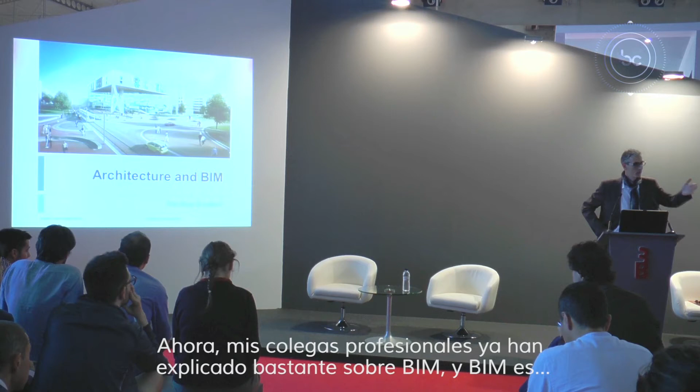Final frontier. Now, my former colleagues already explained you a lot about BIM, and it looks like the new holy grail, that we finally in architecture have found the holy grail. Is it? Later on we will see.

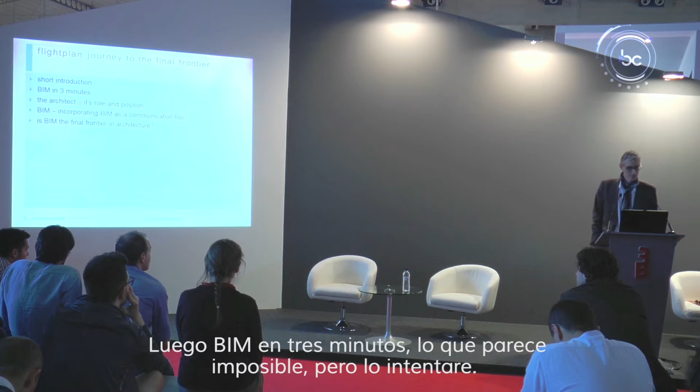I will give you a short flight plan of the journey to the final frontier. First I will start with a short introduction of myself, then BIM in 3 minutes, which seems impossible, but I'm going to try. Then what means BIM for the architect and its role and position in the designing process. Then incorporating BIM as a communication tool. And at last, is it the final frontier, or are we still looking at some developments yet to come?

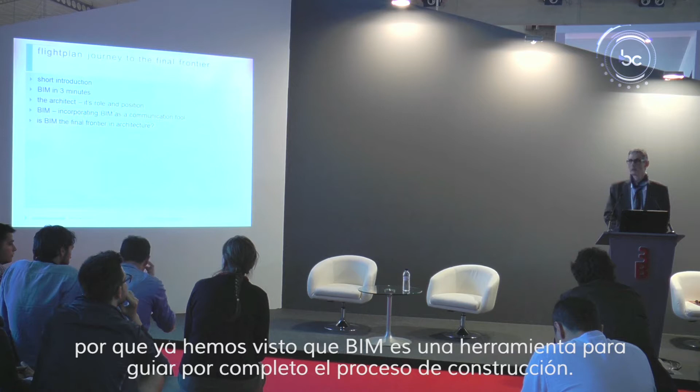Now I want to emphasize another side of using BIM, because we have already seen that BIM is a tool to guide the entire building process.

As already told, my name is Rafael Calis Sanchez. I work for an office in the Netherlands. It was founded in 1928, and we are a full-service office, which means from the first contact with the client until facility management and everything in between.

We design in all kinds of sectors, but we have a long history in hospitals, and later on I will show you a hospital using BIM, because that's very interesting.

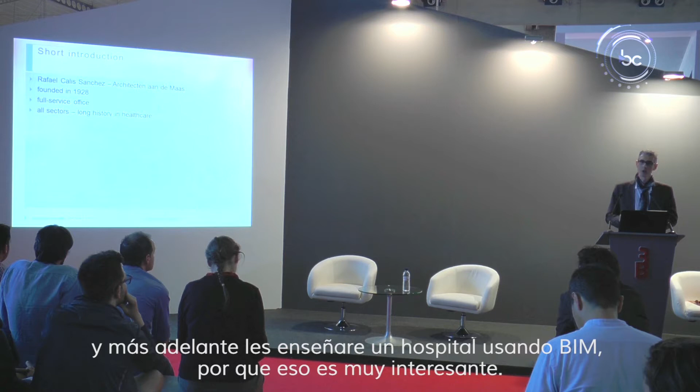A simple house in BIM, well, that's not that difficult. But a hospital is something very different, because you do not only have the physical structure to design, but you also have to communicate with your users, not just the client. My clients are the board of directors, but they are not the users of the hospital. Users are the medical specialists, and they determine how your design should look like.

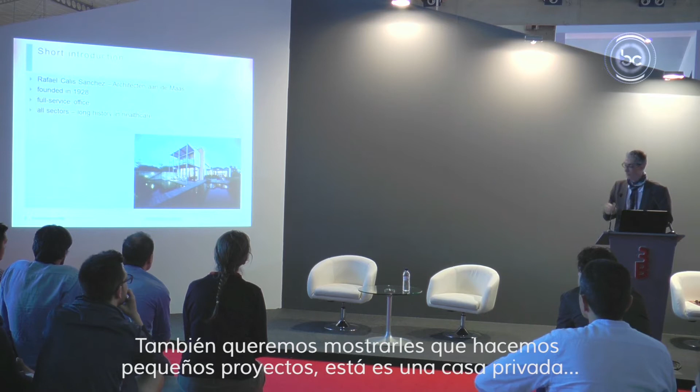We also make very small projects to show you. This is a private house of one of the directors, but up until large projects.

This is the hospital in one of the hospitals in The Hague. This is a middle-sized project for us, about 100,000 square meters. The project I will show you later on is a project of about 200,000 square meters.

But we also make urban plans. This is a development in Russia, a complete new technological city.

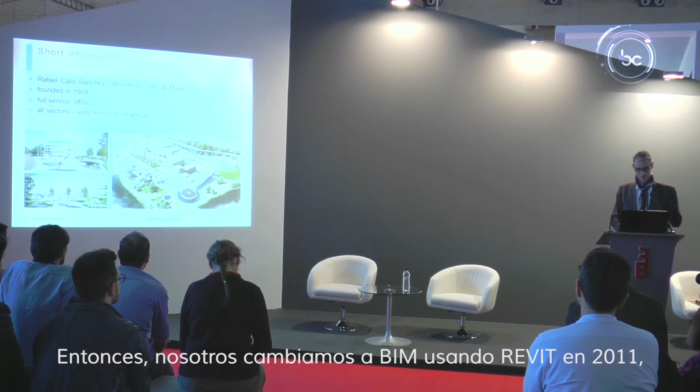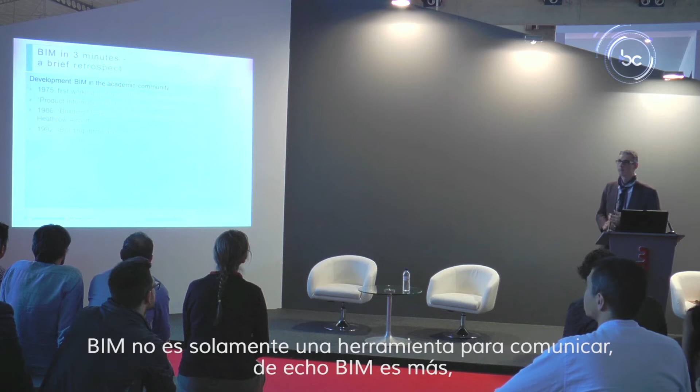Now we switched to BIM using Revit in 2011. One of the reasons why we use it is that BIM is not just a design tool. BIM is not only a tool to communicate. In fact, BIM is more. BIM is a working method. And later on I will show you what I mean by that.

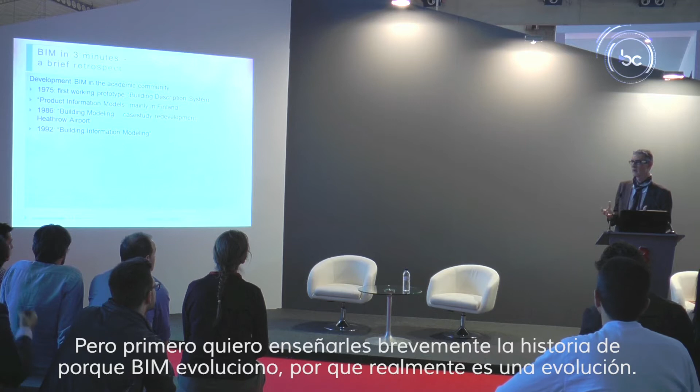I want to very shortly show you the history, why BIM evolved, because it's actually an evolution. You have two different worlds: the academic world and the commercial world. In the academic world, it already started in 1975. There was the first description of a building information model, a building description. Elements have information inside that can be extracted.

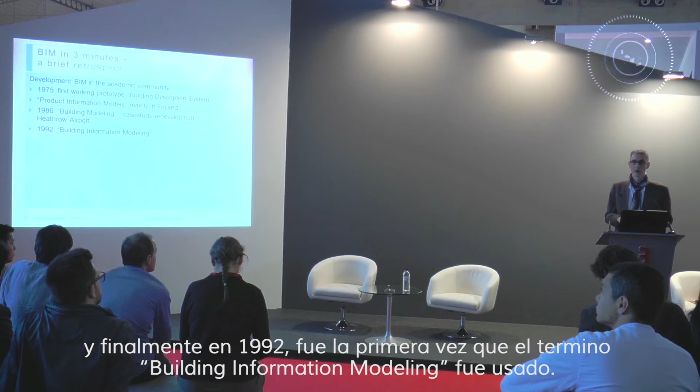From that point on, we saw a development until finally, in 1992, the term building information modeling was used for the first time. The difference between building information modeling and the first building description system was that the building description system was just elements. Building information modeling is all the elements put together, and they have relations with each other.

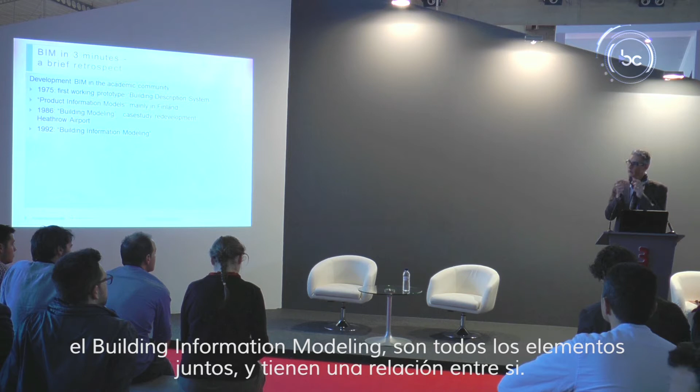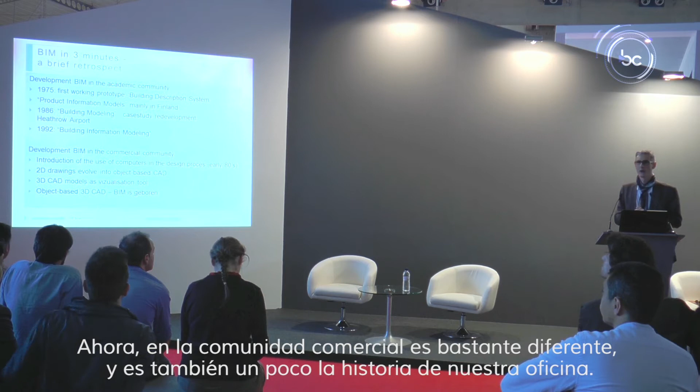Now, in the commercial community, it's very different, and this is also a little bit the history of our office. First of all, we started using computers in the early 80s in the design process—enormous hardware used for very simple design plans.

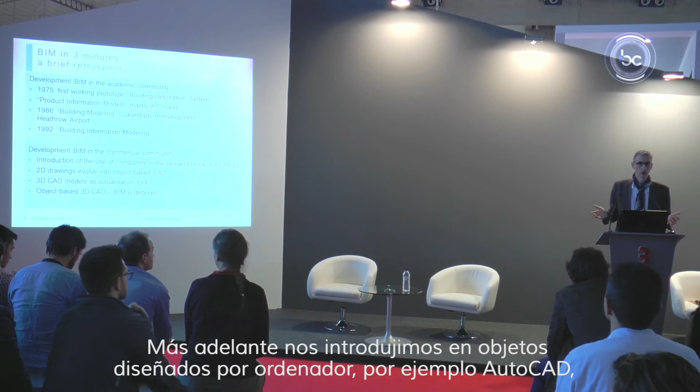Later on, we got into object-oriented, object-based computer-aided design, for example AutoCAD, and then slowly AutoCAD using 3D. We saw earlier an example of how difficult it was to make a 3D model in AutoCAD.

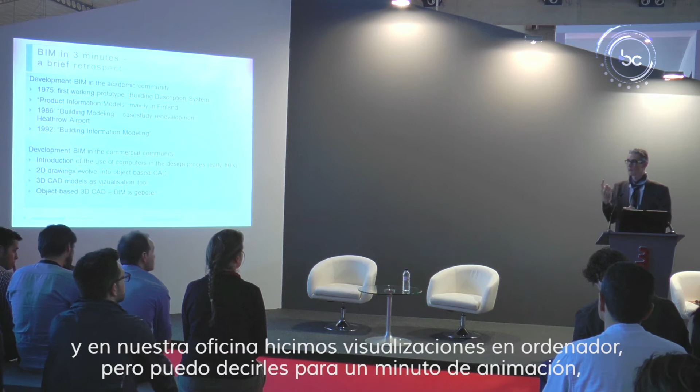And in our office, we made computer-aided visualizations. But I can tell you, for 1 minute of animation, we needed about 3 weeks modeling in AutoCAD, 1 week visualization in 3D Studio, and then 20 computers during an entire weekend calculating all the images. So it was an enormous amount of work.

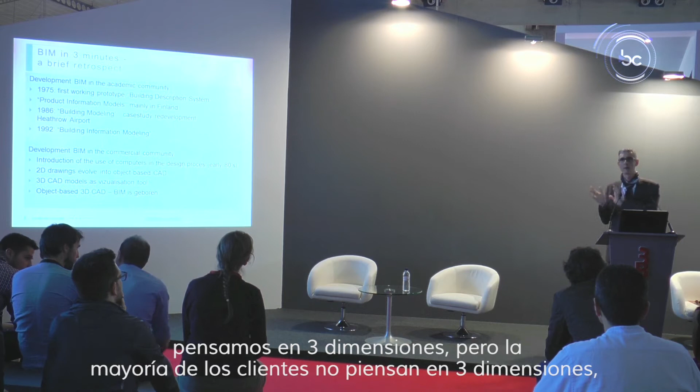But it worked. For clients it worked because, I mean, we are professionals, we think in 3 dimensions. But most of the clients do not think in 3 dimensions. So we need a tool to communicate what we have in our mind.

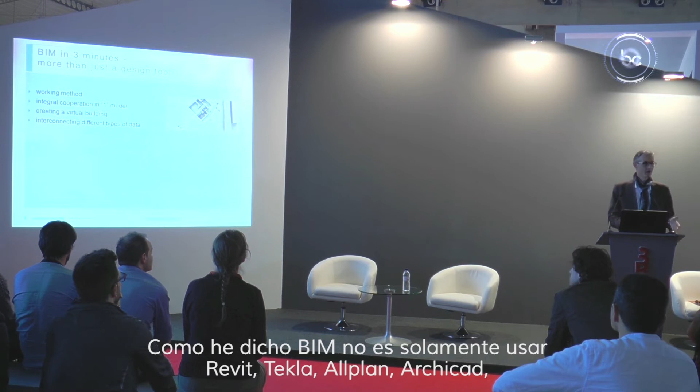And then in the 90s, 3D computer-aided design, object-based was born, and there we have BIM. Now, as I already said, BIM is not only using Revit, Tekla, Allplan, or Archicad. BIM is a working method.

BIM, in fact, starts with the very first question of the client. From that point on, BIM can be used, and as you can see, it's integrated in one model. You already said 40 models - we are using about 20 for the hospital.

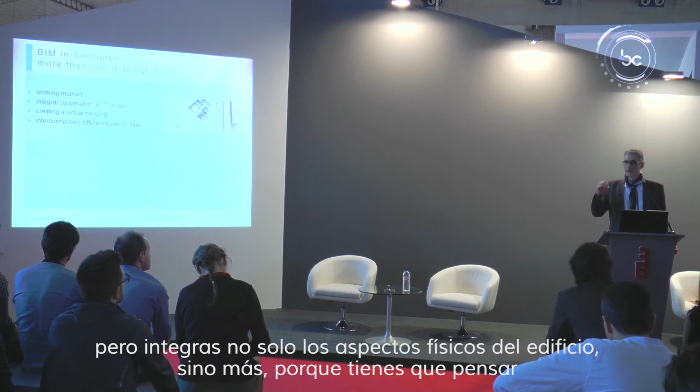But you integrate not only the physical aspects of a building, but more, because you have to think - and that's where I come in later - we have to think now, at the early start of a BIM model, how to build it.

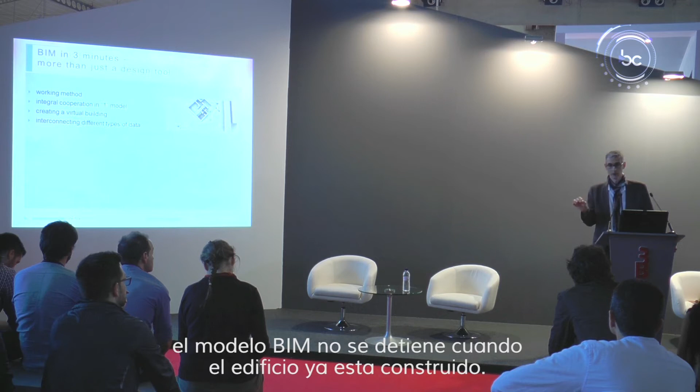Because if you do it right, the BIM model doesn't stop when the actual building is built. You keep using the building model, your 3D model, for maintenance and facility management. If you want to incorporate facility management aspects in your model, you should think about that at the early start, because then you still have the possibility to change your model. Later on, it will cost you a lot more effort and a lot more euros.

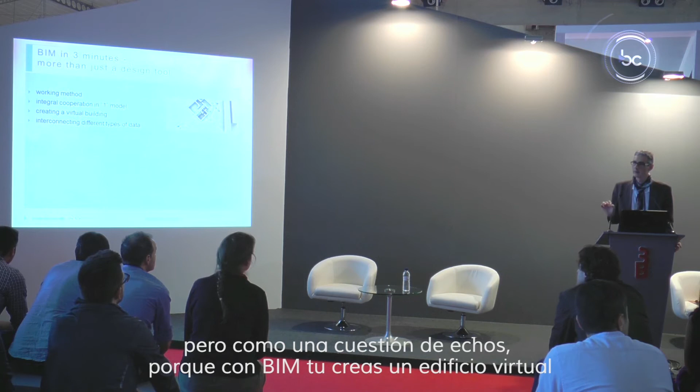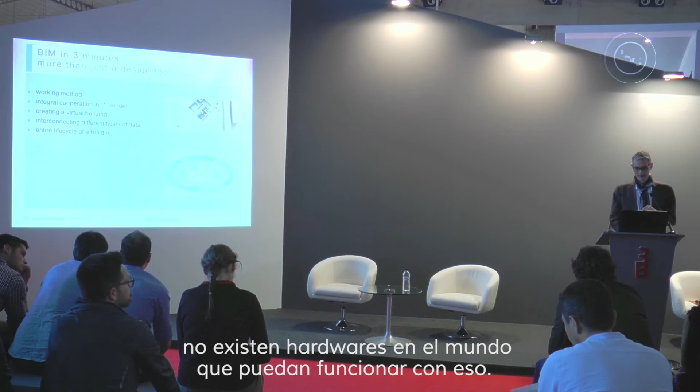As a matter of fact, with BIM you create a virtual building up until a certain level of detail - I don't know if you know the term level of detail 500, which is as-built, but I would advise you not to draw in LOD 500 because you get enormous models. There is no hardware in the world that can cope with that. So BIM is, factually, the entire life cycle of a building, from the first design until it's demolished.

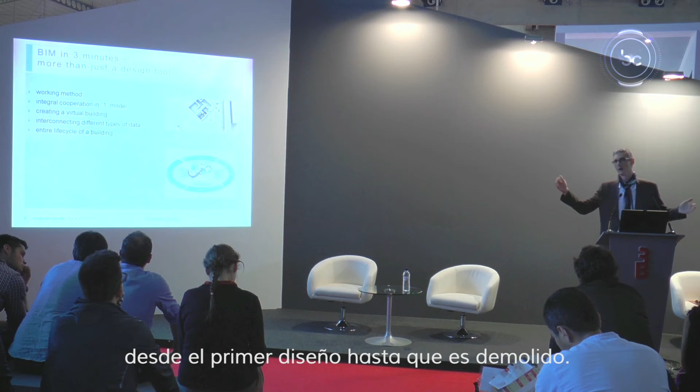Why is BIM so important? Well, I'm going to share a little example with you. I'm not proud of it, but I'm still going to do it. And that's the reason why BIM is, well, for 50% the holy grail.

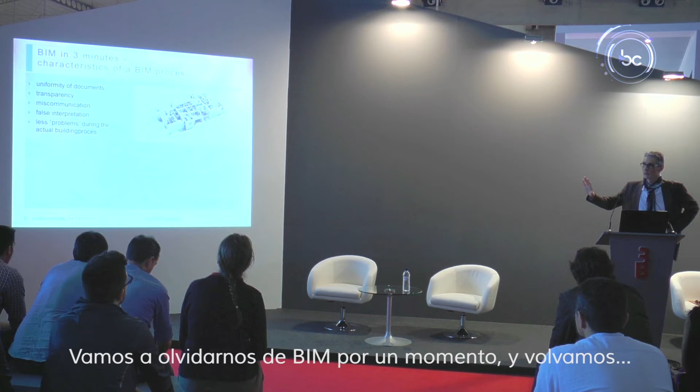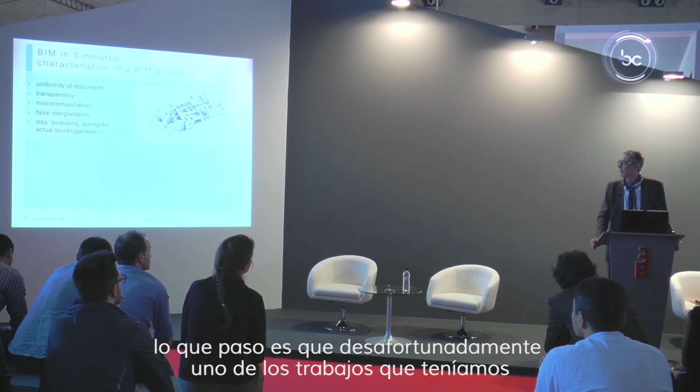Let's forget about BIM for a second and go back to the phase where we were still designing in 2 dimensions - drawing plans in AutoCAD, facades, sections, details, all in 2 dimensions, but all in different archives. Now, unfortunately, in one of the projects we had, there were some errors between a section and a detailed drawing.

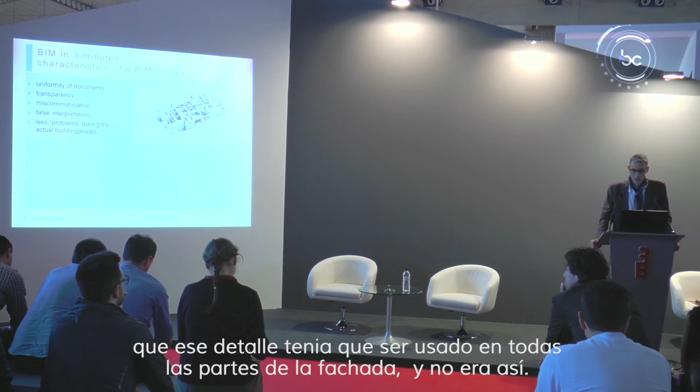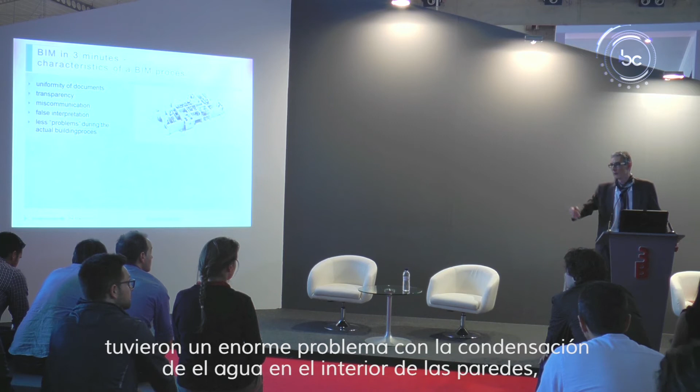The contractor built and saw the detail and assumed that detail had to be used in all parts of the facade, which it wasn't. It was a surgical department, and when they started using it, they had enormous problems with condensation of water on the interior walls.

And if something shouldn't happen in a surgical room, it's condensation of water, because it's not hygienic. We examined how it could happen, and we saw that changes were made in the facade, but the changes were not made in the detailed drawing. And there you have your problem.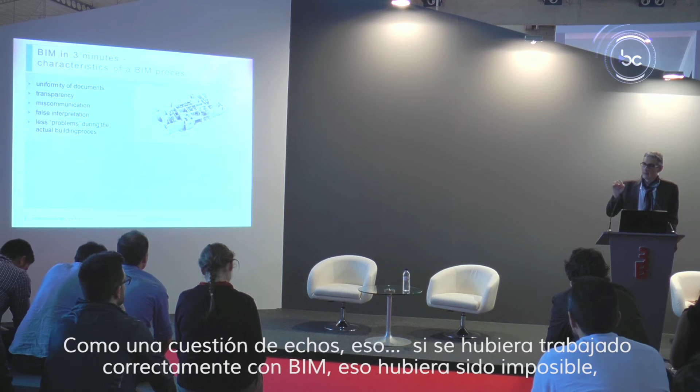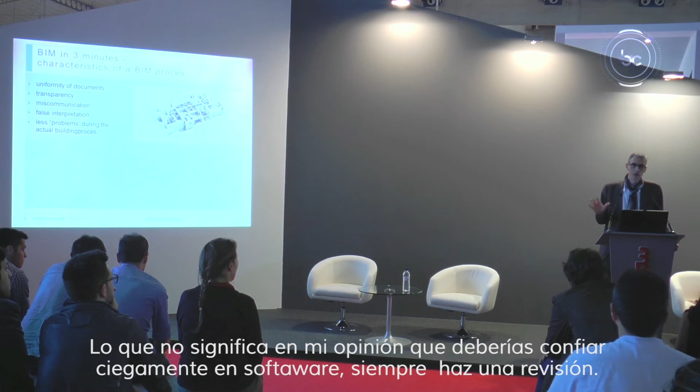As a matter of fact, if you work correctly with BIM, that should be impossible, because if you change something in the plan, it automatically changes in your section, and automatically changes also in your facade - which doesn't mean, in my opinion, that you should rely solely on the software. Always check if everything went well. Of course, during construction, it's a perfect tool, because we can, in advance, see where we have possible collisions. The margin of error and miscommunication is very, very small, and false interpretation is almost impossible.

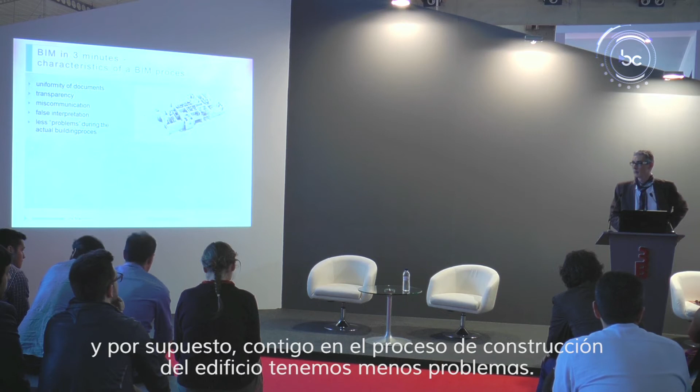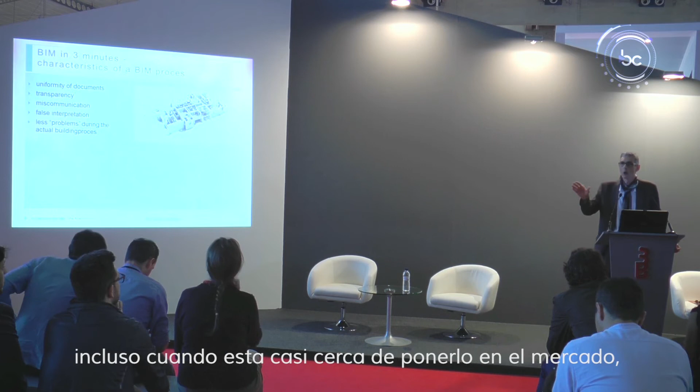Almost. And of course, during the actual building process, we have fewer problems. Let's suppose we have a floor, and in that floor I have to make a hole for an air shaft. If I do it during my design process, it wouldn't take a lot of time - even close to putting it on the market, it will cost me about 5 minutes. With my hourly rate, that's about 20 euros.

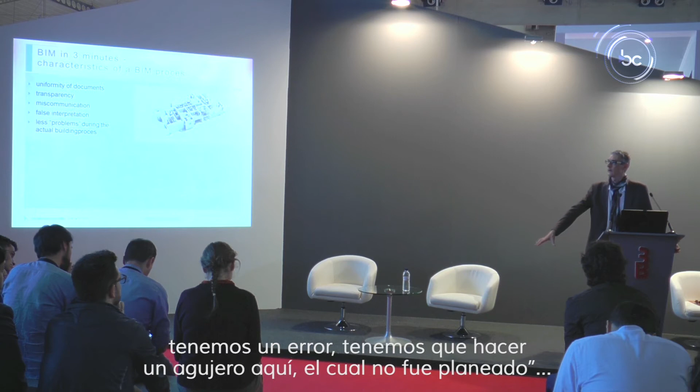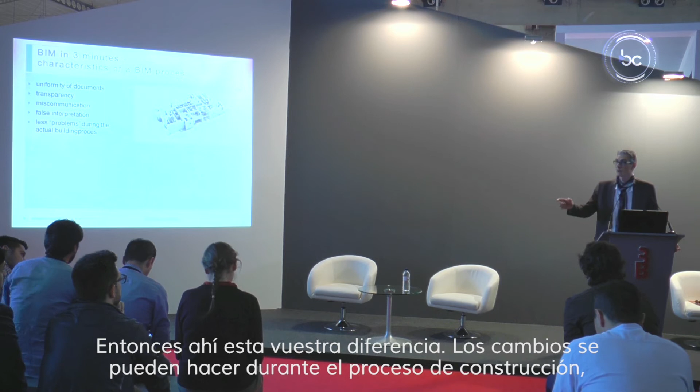That's it, changed. Okay. Now suppose the floor is already actually built, and then they discover, ooh, we made an error, we have to make a hole here which was not planned. I can assure you it will cost several thousands of euros. So there's your difference - changes can be made during the actual building process, but are far more expensive than changes made in the design process.

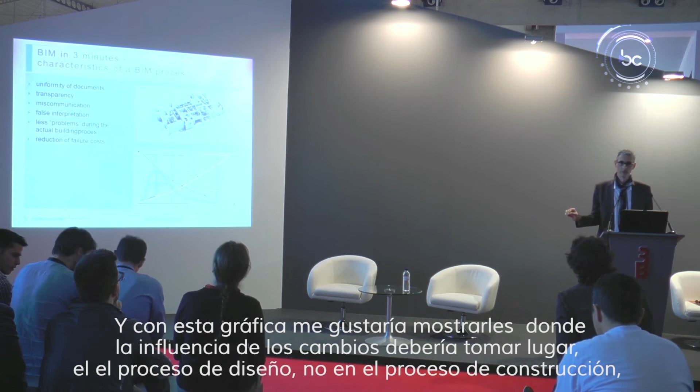So, reduction of failure costs. With this graph, I would like to show you where the influence of changes should take place in the design process, not in the building process. Because the red line is the line of costs over time when you make changes. At the end, when you are building, if you make changes at that point, it will cost you gold.

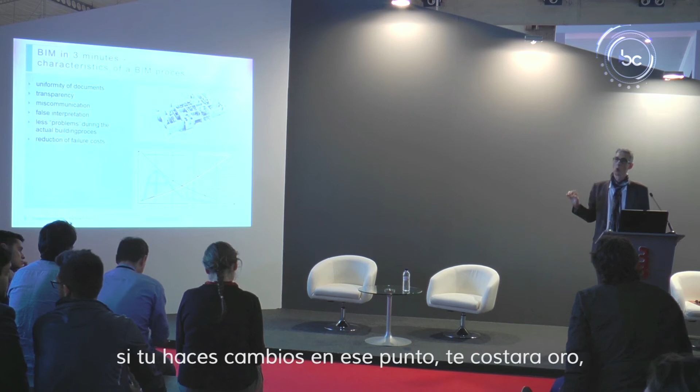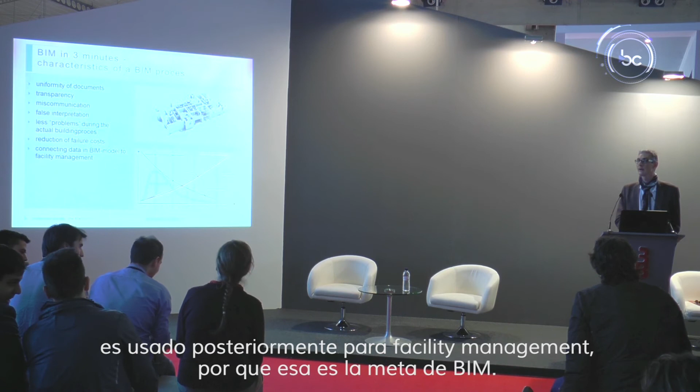And of course, connecting your BIM data that you put in a BIM model, use it later on for facility management, because that's the goal of BIM. The goal of BIM is not only to reduce failure and then that's it. The goal of BIM is using it until the building is demolished. That's what we should think about.

Now, the architect. Architect comes from Greek, architecton, master builder. In the past, we were master builders. We were responsible for the entire building process. We had the first contact with the client, translated his requirements into a building, and coordinated the entire process from the early start until sometimes even demolishing the building.

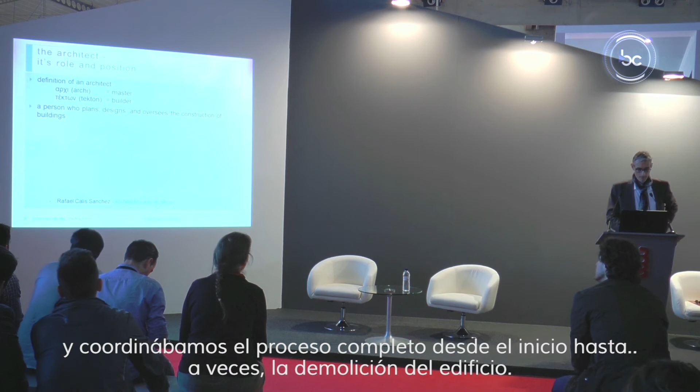So nowadays we make design concepts which have to meet the requirements of a client. But unfortunately, most of the time, that's where it stops for us. And that, in my opinion, is incorrect.

What is also happening, I don't know if it's already happening here in Spain, but the client positions are changing. In the past, for example, in a hospital, a board of directors was my client. Now we have so-called design, build, finance, maintain and operate contracts, which means the actual hospital is not my client anymore. A group of contractors is my client. They hire me to make a building for them, but their client is the actual hospital. So that changes our role.

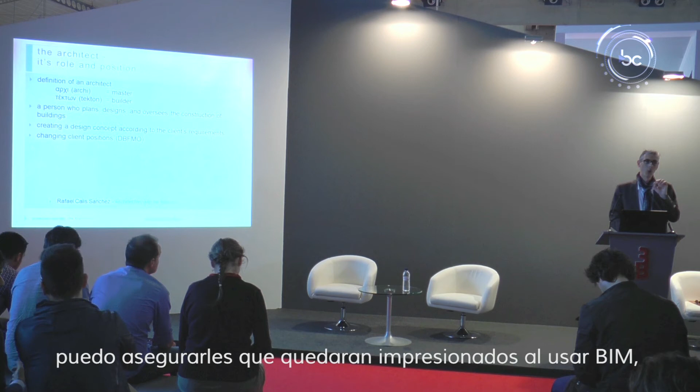We are not anymore the first to come in contact with the user of the building, so we have to think about that as well. And when you have a contract like design, build, finance, maintain and operate, I can assure you that you will be obliged to use BIM, because all contractors want that, since they are actually responsible also for the maintenance of the building.

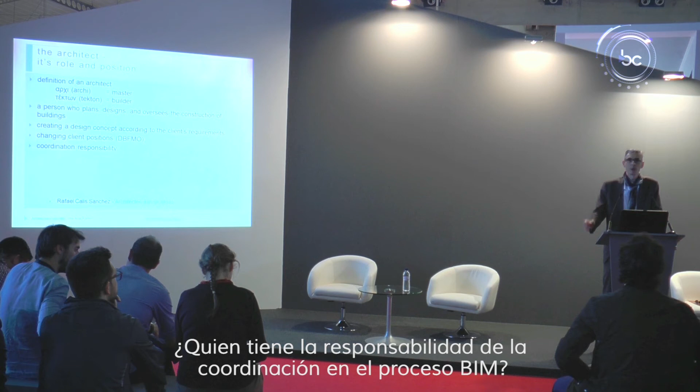And then the coordination responsibility. Who has the coordination responsibility? It's a question I ask you. Anyone have an idea who has the actual coordination responsibility in a BIM process? No one. Well, I myself can't give you the answer, because I don't know either.

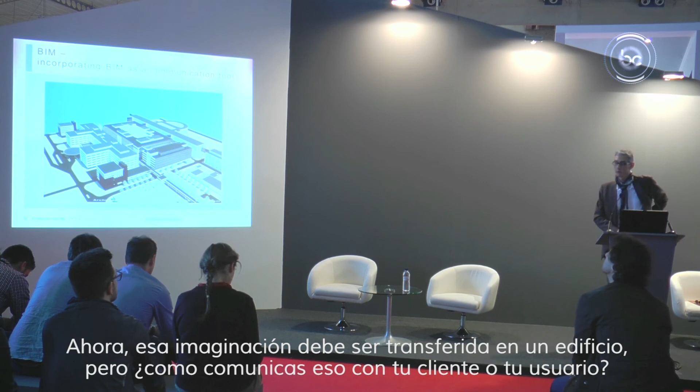But in my opinion, the coordination responsibility should be with the architect. I'll tell you why: because we are still, as architects, the ones closest to the clients, because we make that design concept. We translate the wishes and requirements of the client into an actual building using our imagination. Now, that imagination should be transferred into a building, but how do you communicate that with your client or your user?

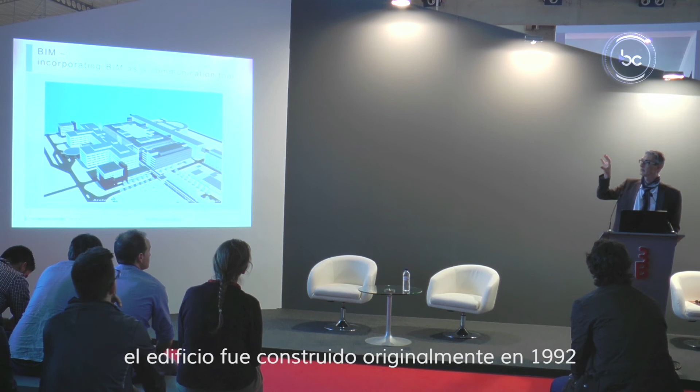Now I want to use this work to show you what I mean. This is the academic hospital in Maastricht. It's a building of about 200,000 square meters. The building was originally built in 1992. Now, the life cycle of a hospital is most of the time 50 years, but after 25 years, a large renovation most of the time takes place.

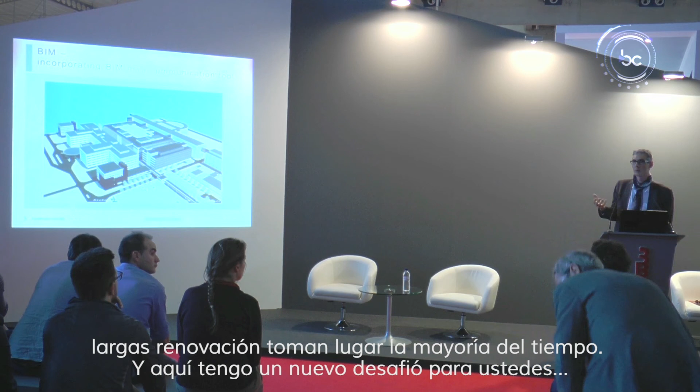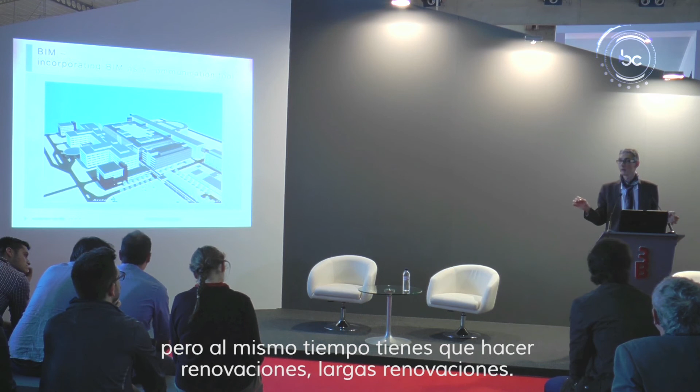And here I have a new challenge for you: creating a BIM model of a building which is already in use, which should stay in use, but at the same time you have to make large renovations. I will show you later on the renovation of the entire Department of Surgical Operations, about 20,000 square meters.

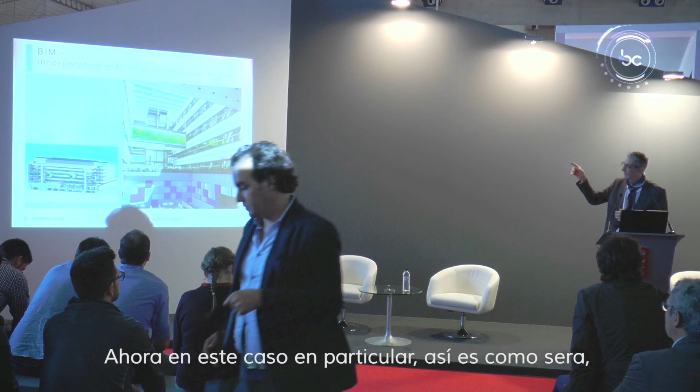First of all, we made a new building there, and we used, in this case, Revit, just to make visualizations. This is a nice communication tool for your client—they can actually see in 3 dimensions how the building will be. In this particular case, this is how it's going to be.

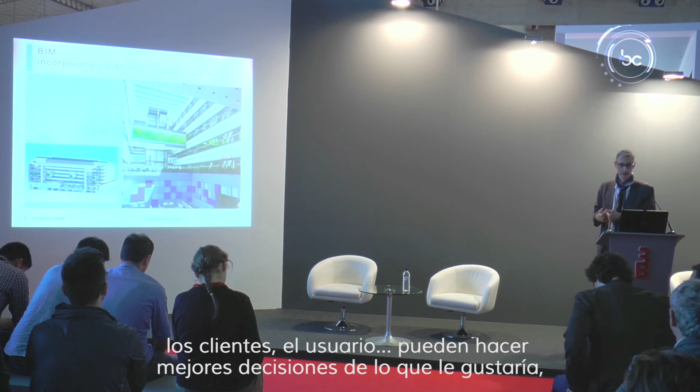But we also use this during the design process to evaluate with the client, especially the wall—the blue wall you see below. We had different types of possibilities for them: a wooden wall, a plastic wall, different colors. With the visualization, the client or user can make better decisions about what he would like, which doesn't mean he always determines how the architecture should be designed, of course.

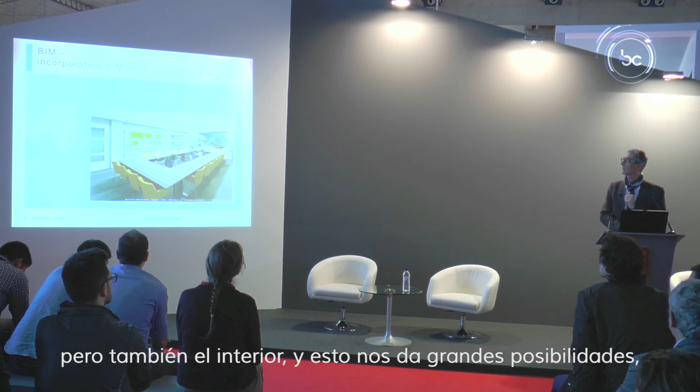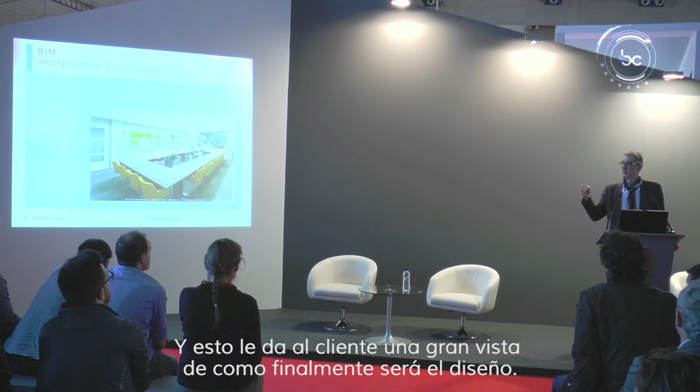But also interior, and this gives us enormous possibilities. This is one of the conference rooms in that building, and there we integrated the lighting and everything up until the plans into the designing model, into the BIM model. This gives the client a very good view of how, finally, the design will be. Unfortunately, I can't show you a picture because they are actually building it at this moment.

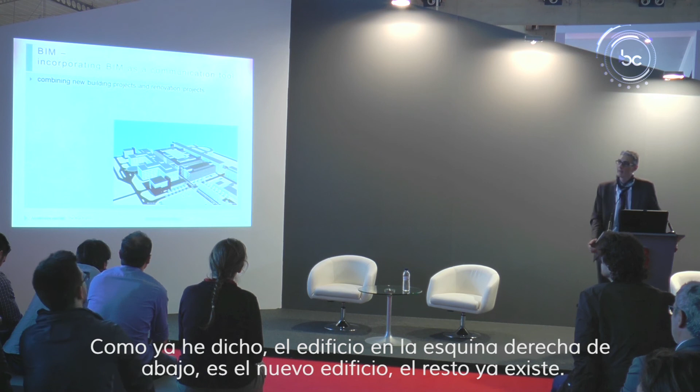As I already said, the building in the right corner below, that's the new building. The rest of it is existing, and I myself are working now at the renovation of that surgical department.

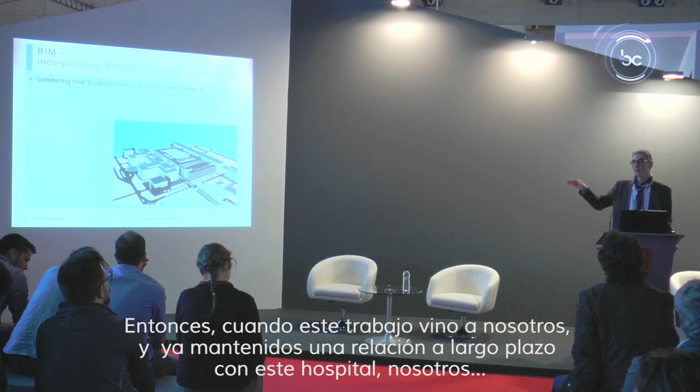So when this work came to us, we have a long-term relationship with this hospital. We actually designed the first hospital. They came to us and said, well, okay, we are now at the beginning of the total renovation of the hospital. So in the next 10 years, the complete hospital will be renovated from inside. And I mean large renovations.

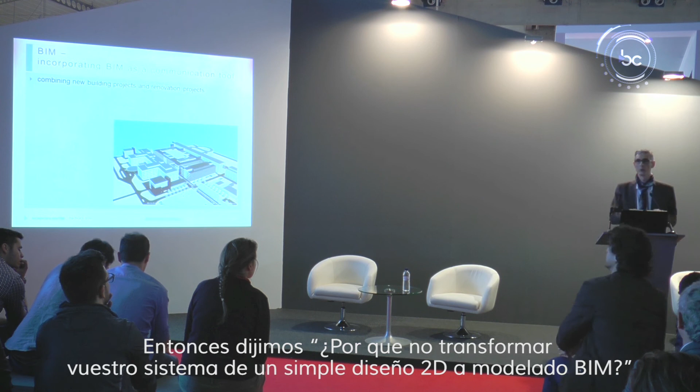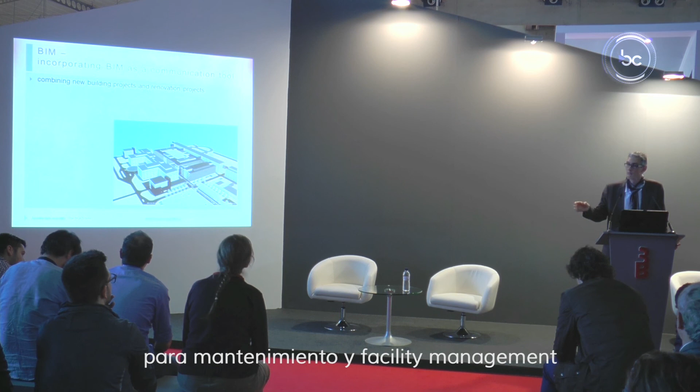So we said, well, why not then transfer your system from simple 2D design to BIM modeling? Wow, good idea. The only thing we forgot is that we now have to think already, at this stage, what kind of information do you put into that model? Because the hospital wants to use the BIM model later on for maintenance and facility management. So that's a challenge.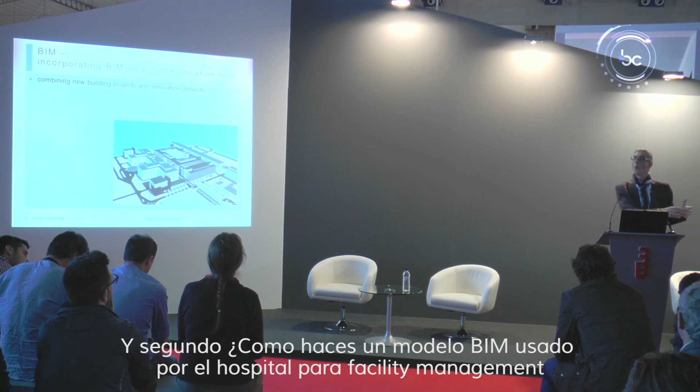Second of all, how do you make a BIM model used by the hospital for facility management while I have to use it at the same time because I'm still renovating another part of the hospital? Maybe it looks like I have a lot of questions, but that's what I also want to show you. We're still not there with BIM.

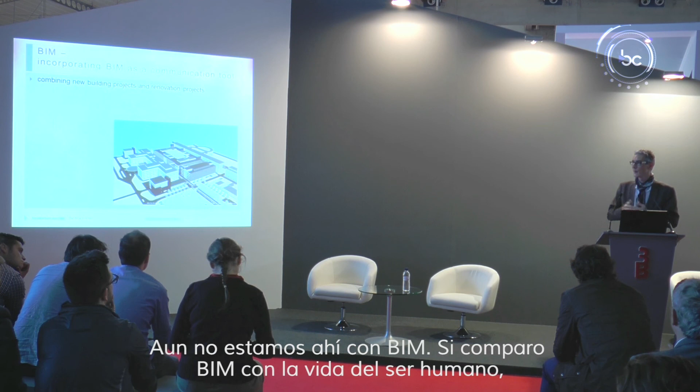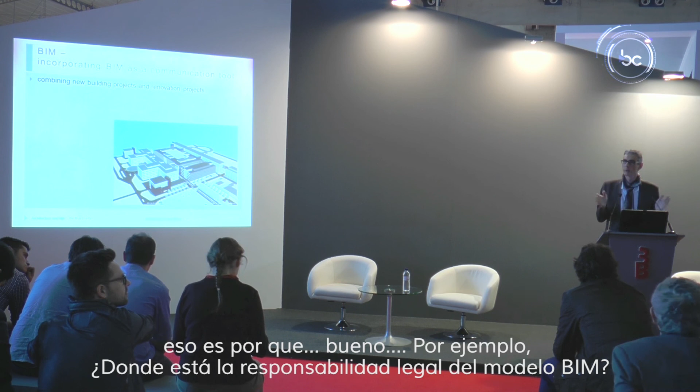If I compare BIM with the life of a human being, I would say BIM at this moment is in primary school. There are still a lot of questions that are not answered by anyone, not even by Autodesk. That's why, for example, where is the legal responsibility of the BIM model?

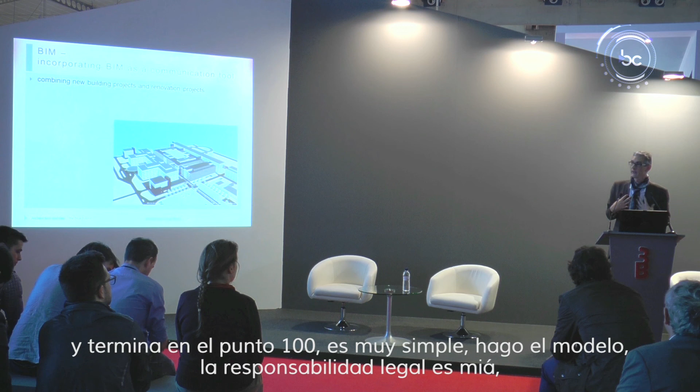Now, if I have, for example, a work which starts at point 0, ends at point 100, it's very simple. I make the model, the responsibility legally is with me, and at the moment the building is built, I transfer the model to the client, and then it's legal for them. But I want to ask you, where is the legal responsibility here?

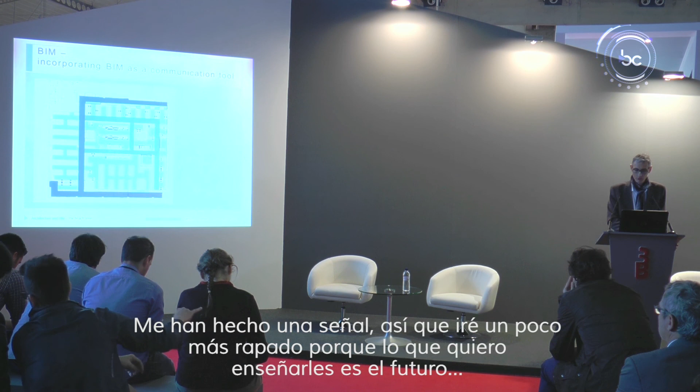Now I got a little signal, so I'm going a little bit faster because what I want to show you is the future. And that's why this one is double.

Just 1 minute, and I'm ready. Final frontier? Well, in my opinion, not. As I already said, we're in primary school. BIM modeling can be used for augmented reality, not only during the building process, but also later on in maintenance.

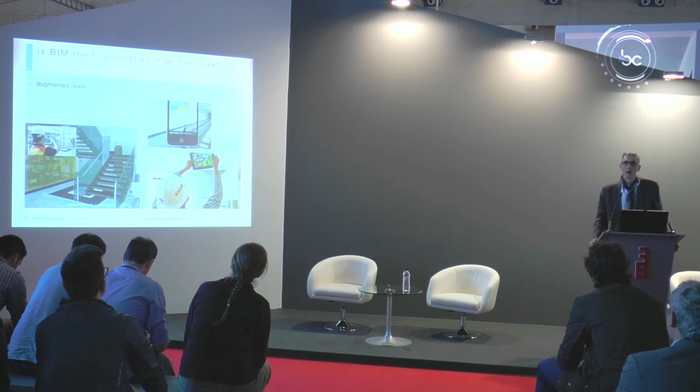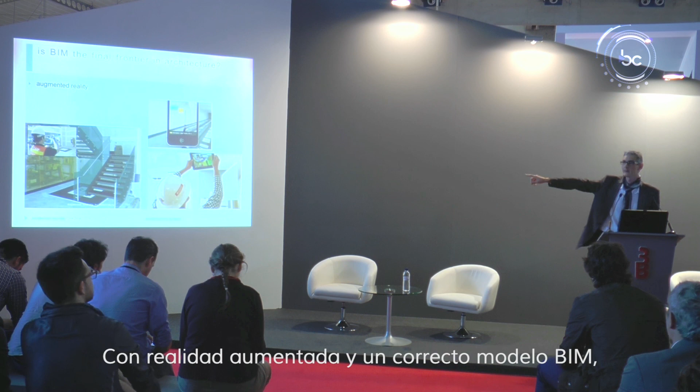How many times doesn't it happen that they have to look at all kinds of drawings? Where are the installations? Where are exactly my shutters? With augmented reality and a correct BIM model, that's our future. They're already experimenting in the United States with that.

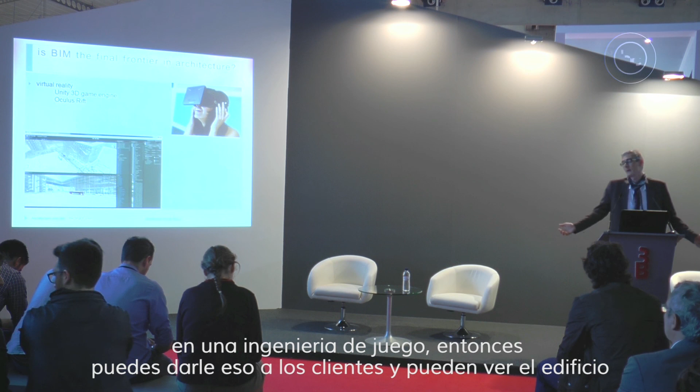Communicating with your client, not only with drawings, no. There is software, Unity 3D, which can transfer your complete BIM model into a game engine, and then you can give that to your client and they can watch their building on a Nintendo, on a Wii console, on an Xbox, you name it. They don't need computers.

Combine that with the Oculus Rift visualization glasses, and you actually can invite your client to your office and say, well, you know what, you want to walk through your building? Have a go. And they can actually experience the building, not only from images.

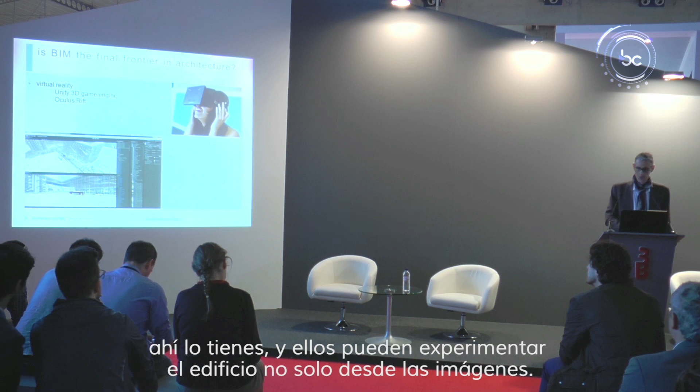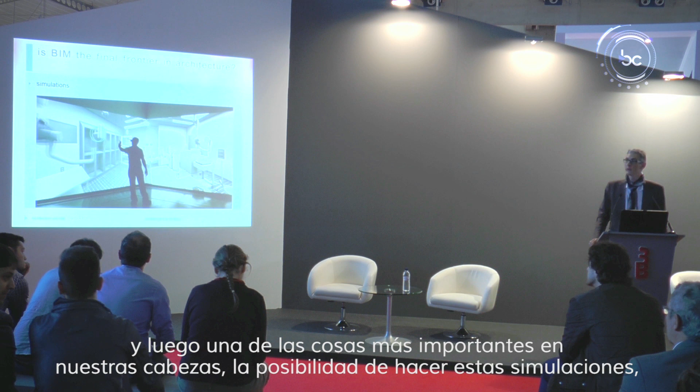And then one of the most important things, and I had the possibility to do this, simulations. Using your BIM model, put your client into a cave, and there they can actually experience this in almost a one-to-one type of scale. And you can communicate with your client and make decisions.

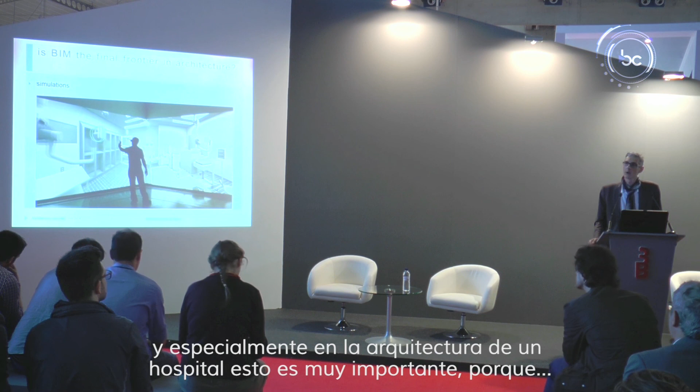And especially in hospital architecture, that is very important, because if, for example, a surgical room is not perfectly equipped, you could have problems, because eventually the workflow of the medical specialist is the most important. We are only servants to make a perfect environment for our users.

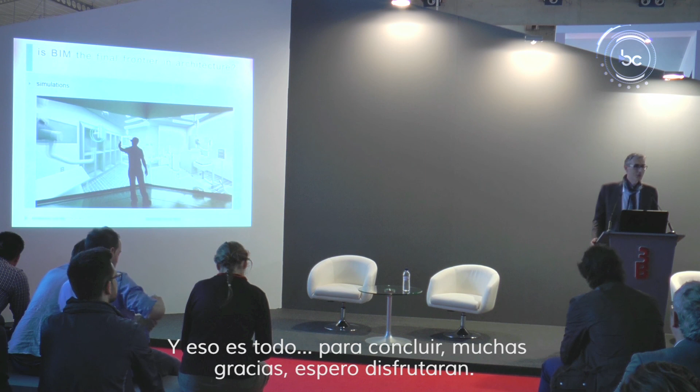And that's what I want to conclude. Thank you very much, and I hope you enjoyed it.